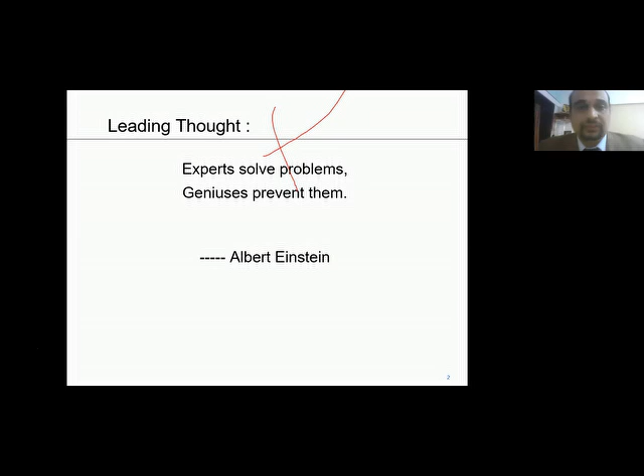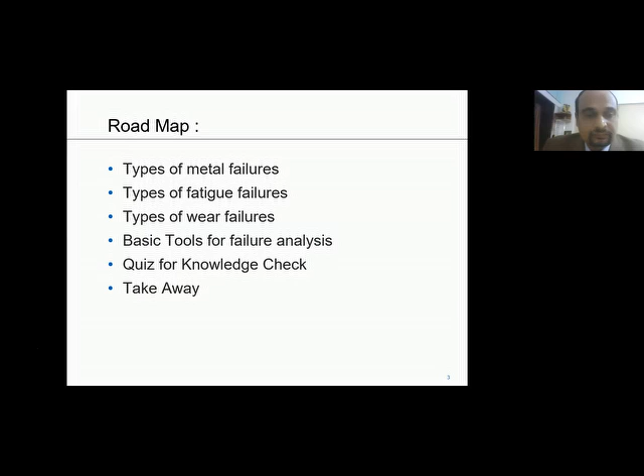Okay, so as you know there are two prominent failures, ductile and brittle. So what really is a ductile fracture?

Before I go into the details of individual failures, let me tell you honestly that Sandeep indicated I will be presenting some case studies. I am not going to present any case study from any industry per se. I maintain that confidentiality and IP related things. But I have taken the photographs from the common public domain that is available, so I have ensured that I'm not disclosing any details for any of the companies I have been through. I have made it informative, and the information is available in the public domain. So just a clarification on that.

But I do have a plan to have one more presentation done like this for an extended period that will deal upon the case studies, masking all the information so that we maintain the confidentiality. So that is in plan, I'll be coming up with that shortly. Okay.

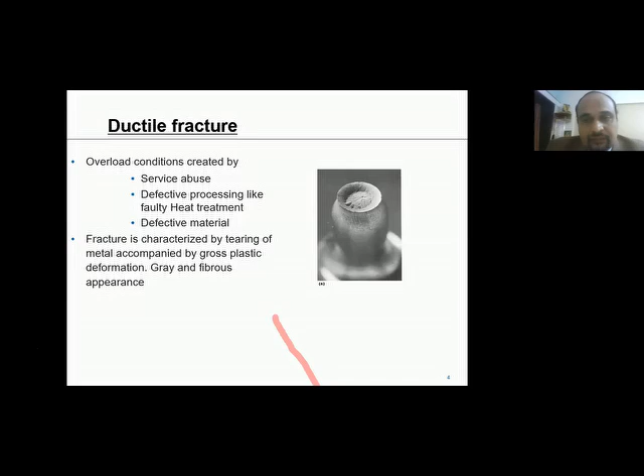Just a moment. So as you can see, the fracture is characterized by tearing of metal accompanied by gross plastic deformation. There is significant plastic deformation before the part fails. And a typical fracture appearance in ductile fracture is gray and fibrous.

So what could be the reasons for ductile failures? As some of them have been listed here, it's basically overload conditions created by service abuse, defective processing, say faulty heat treatment, or defective material. So these are typically the reasons why the material fails.

Mahesh, your screen has gone. Oh, is it okay now? No, not yet. I am also not seeing my camera, I cannot do anything. Just a moment.

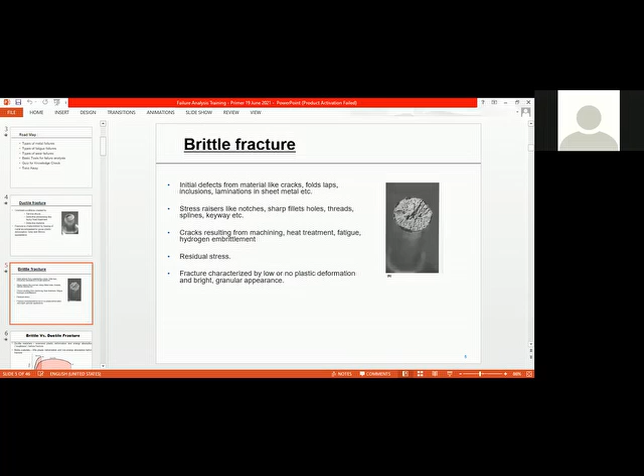Now try again. Yeah, it has started to come. I think some technical goof up happened. Okay, continue, we can now see it.

So this is how the brittle material will fail in a brittle manner. You can see the fracture shown here. It is characterized by low or no plastic deformation. There will be no indication before failure, and typically the appearance will be bright and granular. So looking at the fracture, you can differentiate whether it has gone in ductile mode or brittle mode.

So these are some quick checks that one can see on the part. What are the reasons? It can be initial defects like cracks, folds, laps, inclusions, laminations, or there can be stress raisers like notches, sharp fillets, threads, splines, keyways, cracks resulting from machining or heat treatment, fatigue, hydrogen embrittlement.

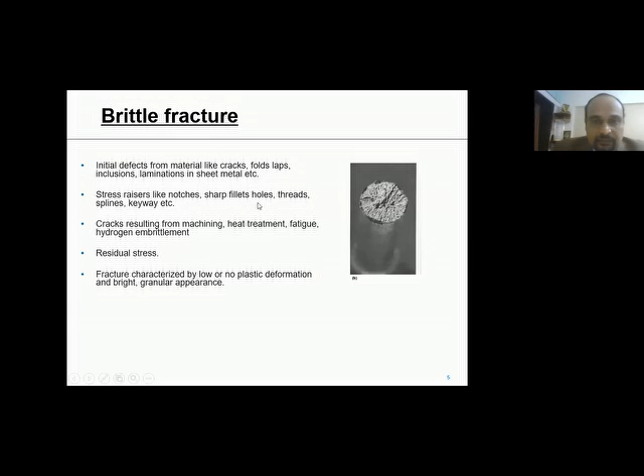That is also one very interesting thing happening in industry. Residual stresses, the prior residual stresses present in the material. So there can be n reasons. Some of them are documented here.

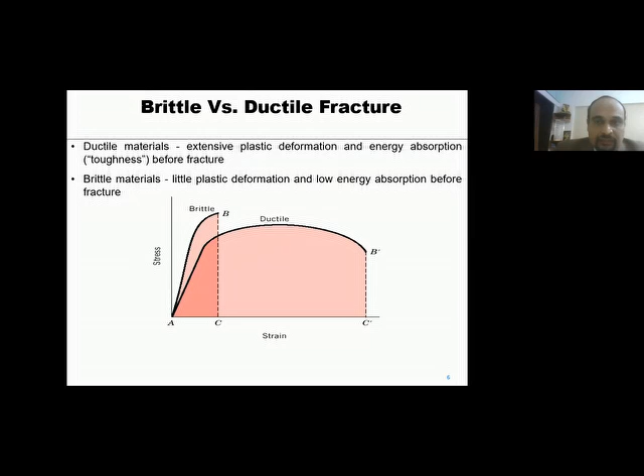So basically, this is very fundamental. Ductile materials have extensive plastic deformation prior to failure, so a lot of energy is absorbed, that is toughness before fracture. You can see this engineering stress-strain diagram shown for a ductile and brittle material. Whereas brittle material will fail without any indication, with very little or no plastic deformation, and the toughness will be very low.

Mahesh, could you be a little louder please? Very loud, your sound is very low. Okay, thank you. Is it okay now? Yes. Is this okay? Yes, okay.

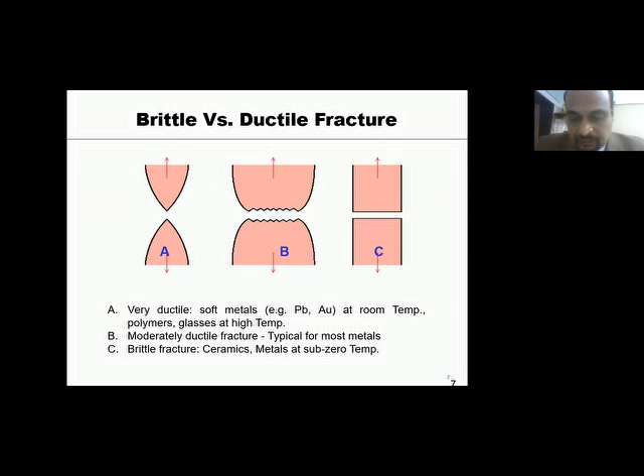The C category is for metals at sub-zero temperature or ceramics, because they are brittle in nature. So they will fail without any indication.

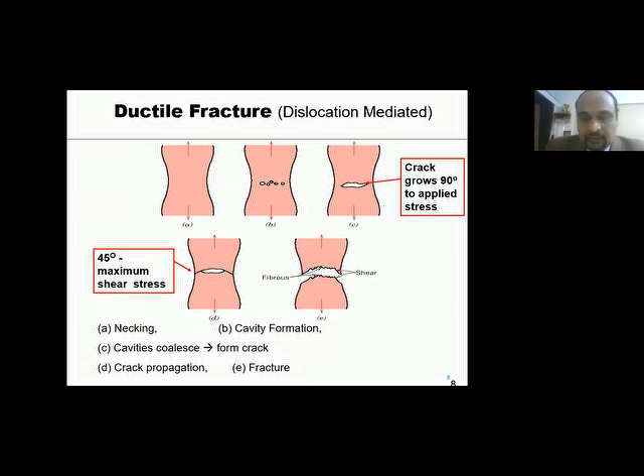So this is the cup and cone fracture shown in aluminum. Typically these are the two counterparts normally observed when you break it in tension. Scanning electron microscopy photographs are shown here just to indicate. It is typically dimpled ductile fracture, which is the term we use. These dimples are nothing but microcavities that actually initiate crack formation.

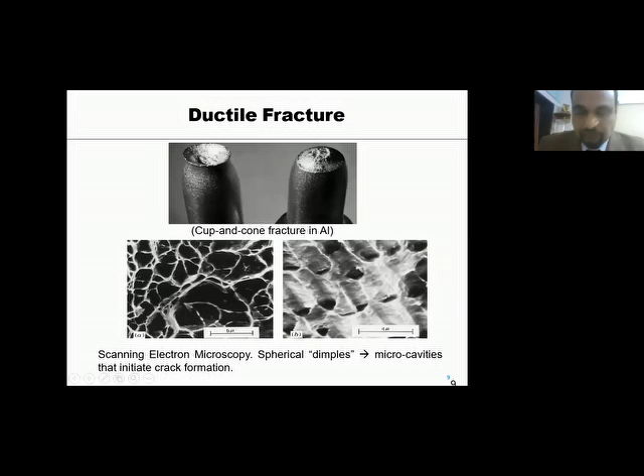So exactly opposite is brittle fracture. As I told, the crack propagation is very fast and it propagates perpendicular to the direction of applied stress. It is typically called a cleavage failure, where it is a breaking of atomic bonds along specific crystallographic planes. That is the metallurgical mechanism that happens in brittle failure, and there is no appreciable plastic deformation.

So you can see the fracture shown here, it's quite plain, quite planar. It's not like the ductile one, which has a shear fracture at about 45 degrees to the axis. So these are very, very quick points to judge whether the material has failed by ductile failure or brittle failure.

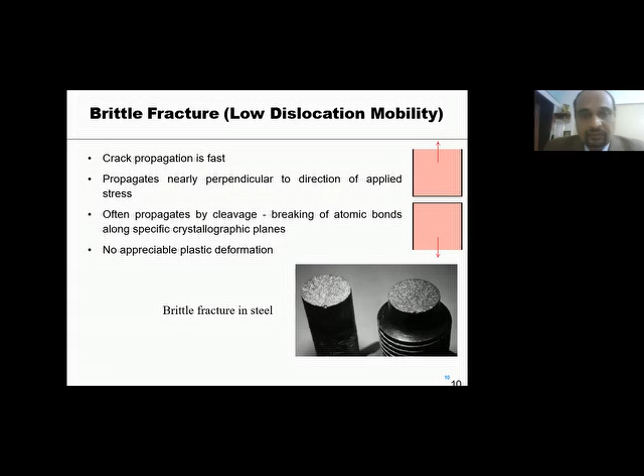In brittle failure, it can go in two manners. One is called transgranular, the other intergranular. Transgranular is the rupturing of grains, where the crack travels by rupturing the grains. Intergranular is where the crack follows the grain boundaries, which are normally weakened due to embrittlement or impurity. This typically happens in embrittlement failures.

You can see here the difference in the fracture as shown in scanning electron microscopy. Intergranular failure is typically called honeycomb, you can see the cellular structure. It's quite clear if the crack is following that path. Majority of brittle failures observed in industry are intergranular, because of embrittlement or some impurities onboard.

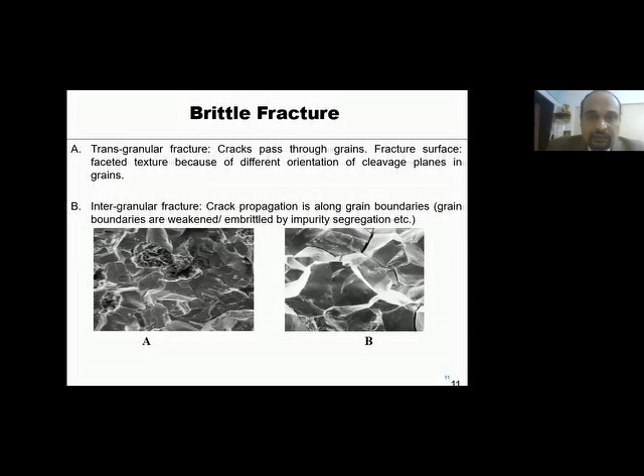Now coming to fatigue failure. Basically fatigue happens under fluctuating and cyclic stresses. The failure can actually occur at very low loads compared to static load. If you keep loading in static versus the part rotating, it can fail at a very low load than expected - that's called fatigue. In industry, 90% of all failures of metallic structures are fatigue failures, that is what the data says.

Mainly, the failures we observe in bridges and all industrial applications - aircraft, machine components, etc. - the reason is fatigue failure. The root cause could be various, but the reason is fatigue.

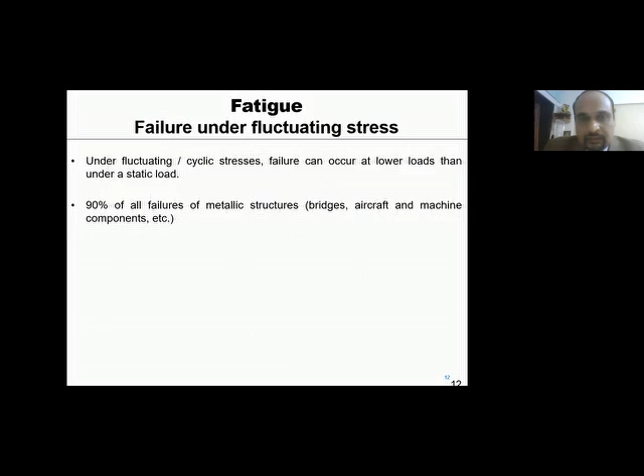So what is cyclic stress is what is important in fatigue. You can see on the screen some acronyms or symbols. What are the main terminologies used in fatigue? Nothing but mean stress, range of stress, stress amplitude, stress ratio.

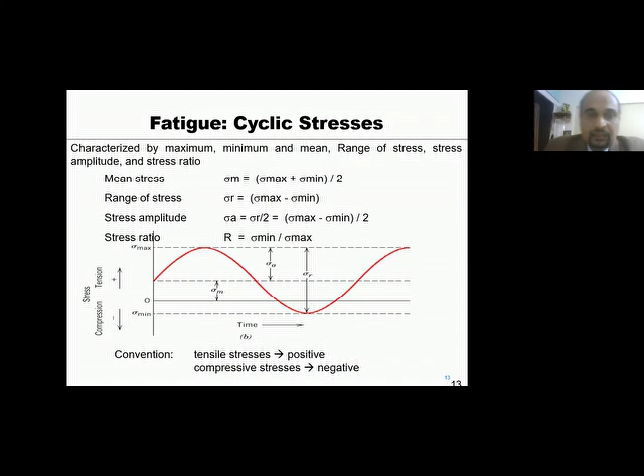You can see it's a sinusoidal wave. Tensile stresses are positive and compressive stresses are negative. So it's a sinusoidal wave, and several such waves form the alternating stresses to which a component is subjected. This is mainly used in fatigue life calculations, for determining the fatigue life of metal. These are the important terms in that.

How basically the fatigue life of a material is established or estimated - it is called a rotating bending fatigue test. As you can see here, there is a dog bone shaped sample made out of the part, and it is flexed by holding it as shown in the figure, and under bending load it is actually rotated. You can see the counter here, which counts the number of cycles the part goes through prior to failure or breakage. The aim is to break the sample and record how many cycles it has taken to break.

So what's the use of this? With this, at different loads, when we conduct this test, we get a stress versus number of cycles graph for the part. There are two categories: low cycle fatigue and high cycle fatigue. Typically, low cycle fatigue happens under very high loads - when you subject the component to very high load, it fails very early, in a low number of cycles. High cycle fatigue is where the loads are not that high, it's basically a low load failure, but the number of cycles is large. These are the common terminologies used in industry - low cycle fatigue or high cycle fatigue.

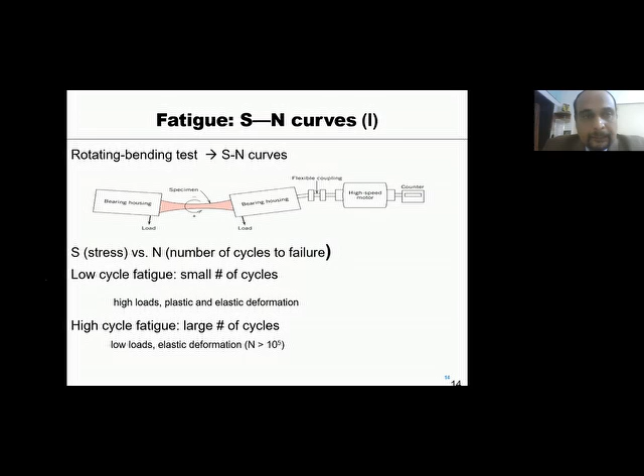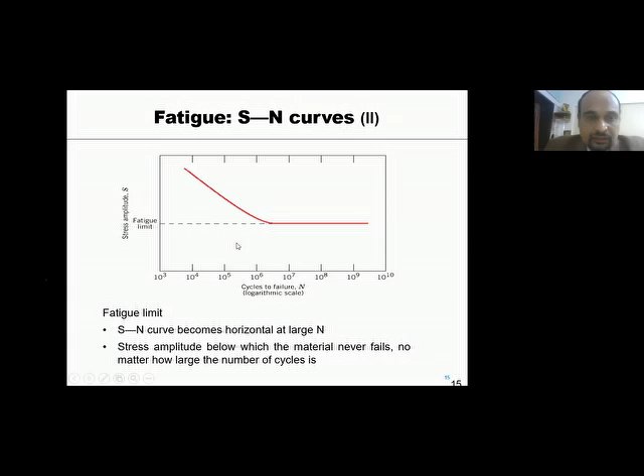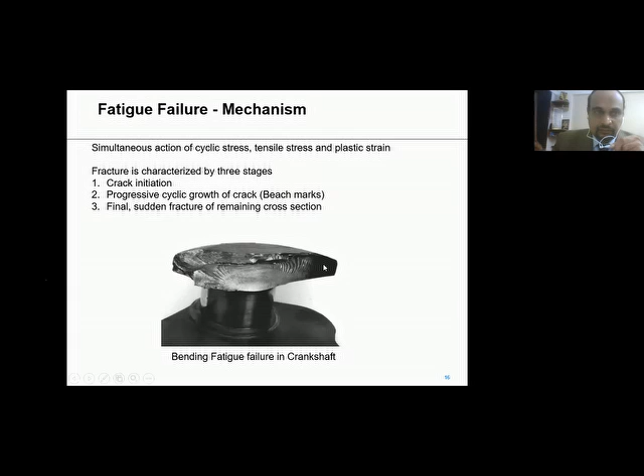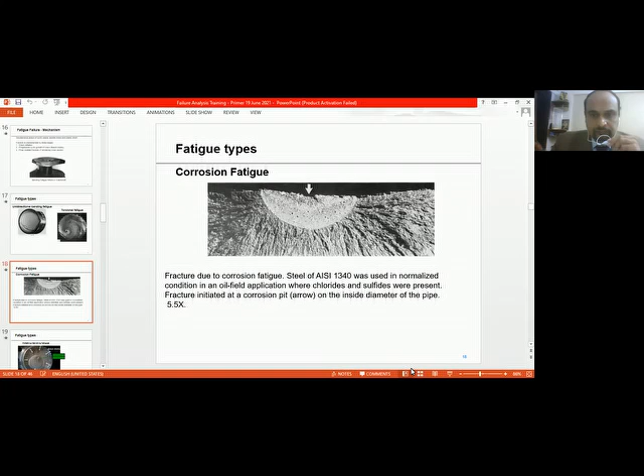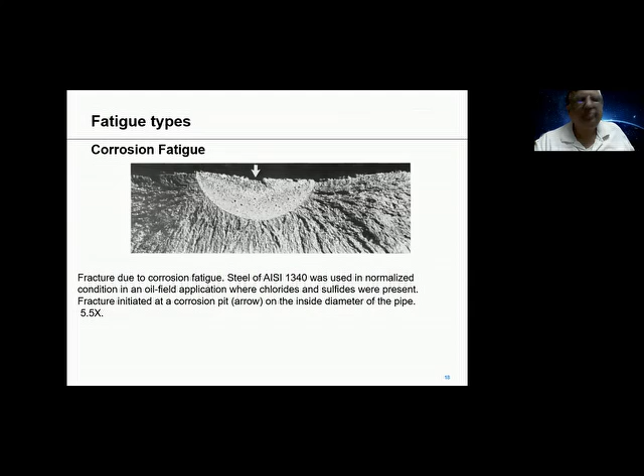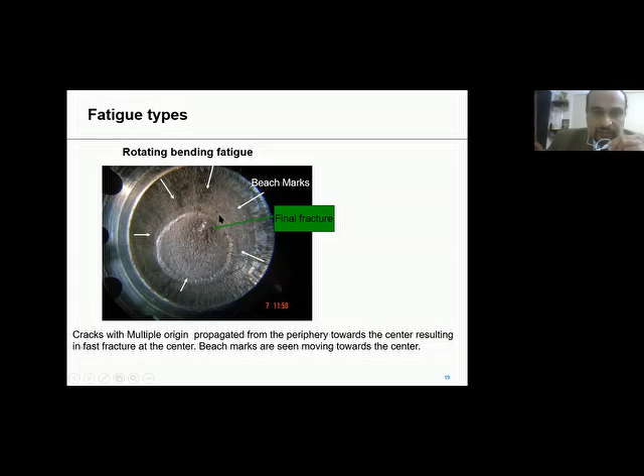So now this is what I was talking about, rotating bending fatigue. As you can see in this picture, the cracks start from multiple origins on the periphery and move inside, and you can see here the final fracture is very close to the center. So this is precisely the difference between torsional fatigue and RBF. And of course there is no twisting of lines, so that is an additional point. But if somebody sees it superficially, the fractures can get misled because of the similarity in appearances. So RBF is the fracture that starts from the periphery from multiple points, and the fracture travels inside towards the center, and the final fracture is close to the center.

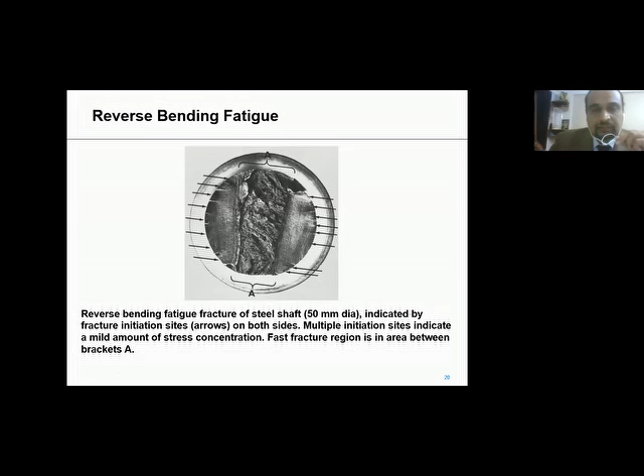So these are the very quick checks when we get to see fractures. At least, by looking at them—I'll talk about the tools later—but at least the naked eye examination and some low power examination gives us a very good idea as to what must be the fracture mode.

Now, this is another type that we observe in engine components: rolling contact fatigue. What is rolling contact fatigue? It happens in all components that are in touch, in contact with each other, and have a motion amongst them. So it can happen in gears, camshafts, and rolling element bearing rollers.

So, typically, what happens? Is that okay, doctor? Any problem, like inaudibility or anything? No, it is okay now. Please go ahead. Okay, yeah, thank you.

So the crack typically generates at subsurface level, and then it travels and connects to the surface, and the portion is plucked off. It is typically called spalling. We observe this in camshafts when they experience overspeeding in engine operation. This is also typically called butterfly wings. If you see an ASM book, it has been described as butterfly wings, as the pattern of the crack is like butterfly wings. So this is rolling contact fatigue that happens in contacting surfaces.

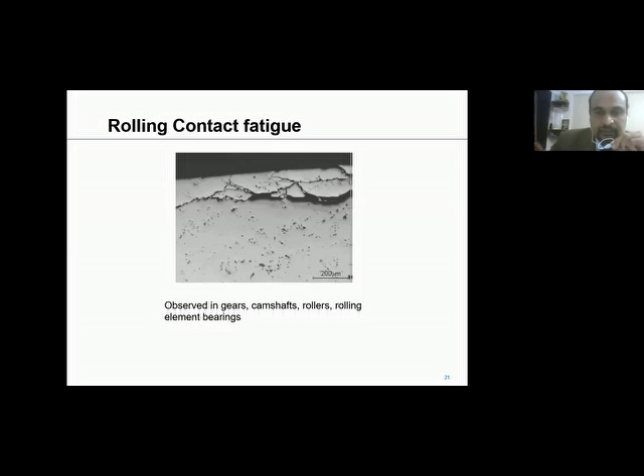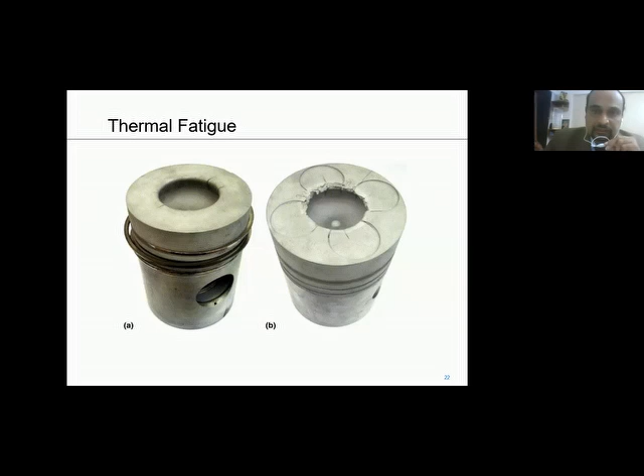So coming to the causes of fatigue failures. What could be the causes of fatigue failure? If you see the causes, they are interlinked. It is only the manner in which the part fails that determines the mode of failure. But for fatigue, there can be service overloads that can affect high cycle or low cycle fatigue - sorry, high stress, low cycle fatigue. Then there can be bad design where there are abrupt changes in adjoining sections of the part, so it's basically a design issue.

Or there can be inherent material defects like inclusions, cracks, porosity, shrinkage, manufacturing flaws like sharp radius, improper blending of radius, and residual stresses - tensile residual stresses that can happen in machining operations like grinding and polishing. Every machining operation will create some kind of residual stress which we need to mitigate.

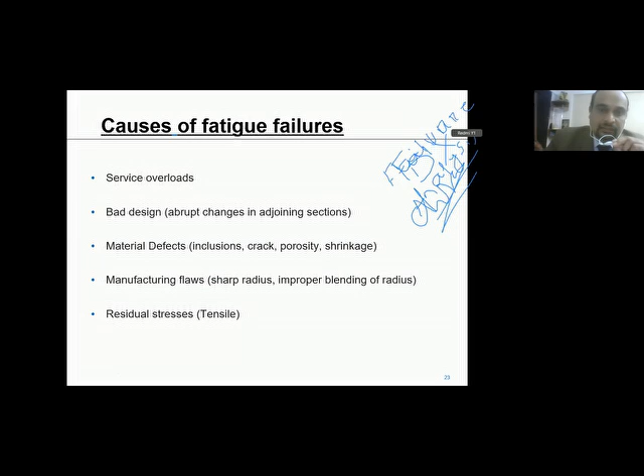These are the typical reasons, and I have talked largely in my presentation about surface fatigue, but there can also be subsurface fatigue generation. These are the causes that can generate subsurface fatigue: inclusions, cracks, porosity, or shrinkage - whatever inherent defect is in the material will start a subsurface fatigue initiation. I don't have the photograph right now with me, but I'll include that. Typically, by the location of fatigue initiation - whether it starts from the surface or subsurface - you can proceed with your analysis, because that will change the direction of analysis.

Now coming to wear failures. Wear and friction go hand in hand. Whenever there are surfaces in contact, there will be friction, and if they are under load and in motion, wear will definitely result. That's why wear is defined as progressive loss of material from a surface as a result of relative motion at the surface. Wear is usually a gradual process, and there are no accurate means to quantify it. Friction and wear are influential on each other, so it's really a complex relationship, and there are many factors that need to be studied to arrive at a proper root cause.

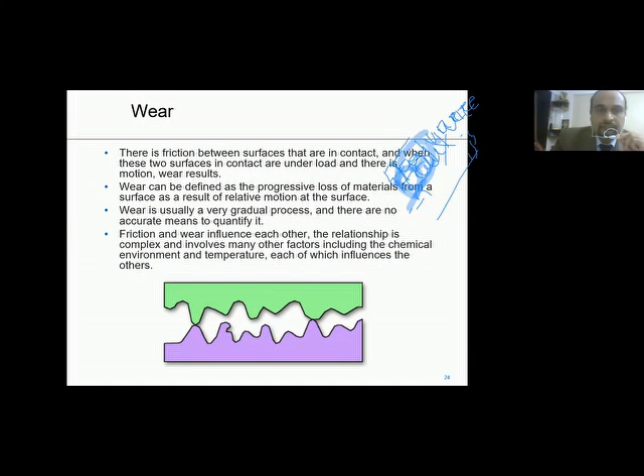Screen is not changing. I'm just trying.

So why do we focus on wear in industry? Because wear is undesirable - there can be increased clearances between moving components, loss of precision, and because of that there will be increased vibration and loading. It leads to significant maintenance and replacement cost in many applications, and the efficiency of the equipment is also reduced. That's why wear is undesirable.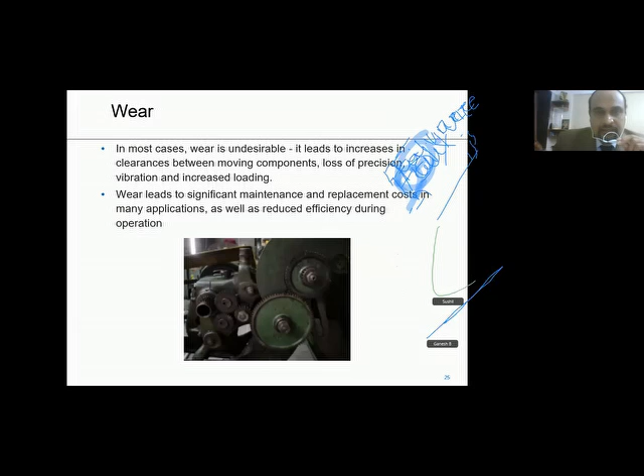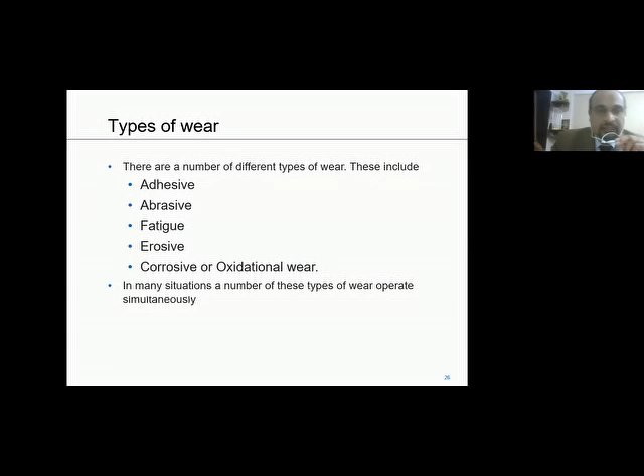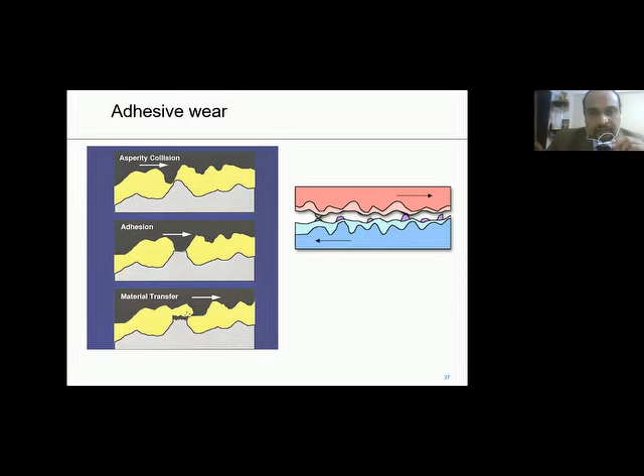So here the adhesive wear mechanism is shown. Whenever two contacting surfaces are sliding against each other under load, there will be asperities, which are high points in the contacting materials. These high points will collide with each other while moving against each other under load. This collision results in adhesion of the high points, and material gets chipped off or plucked from one material to the other, depending on which hardness is more. This material gets firmly glued to the harder material. This is called adhesion or adhesive wear.

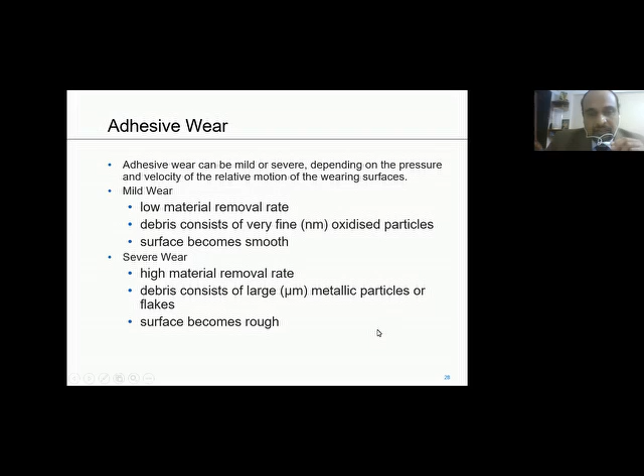It can be mild or severe depending on the pressure and velocity. These are two very important parameters in friction: pressure and velocity, called the PV factor. Depending on that, the adhesive wear can be mild or severe. Mild wear has a low material removal rate, and the debris consists of very fine oxidized particles, and the surface looks smooth. But severe wear has a high material removal rate, and debris consists of large metallic particles or flakes, and the surface becomes very rough.

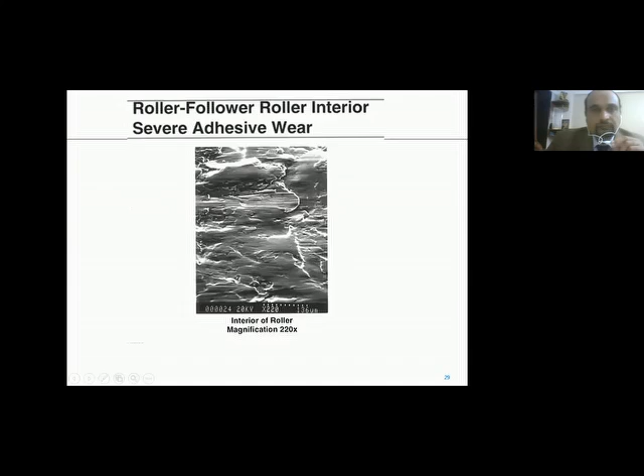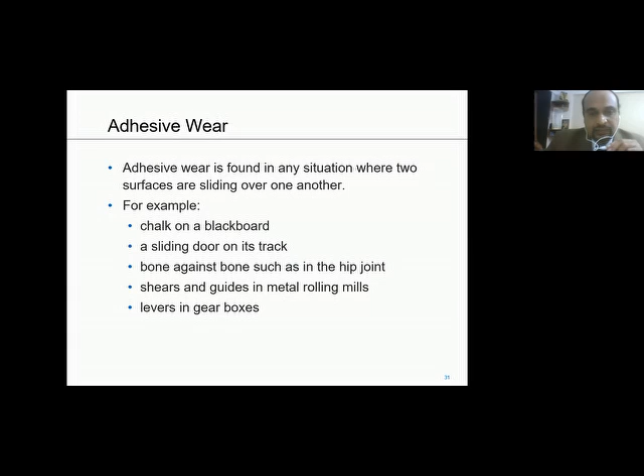So what are typically the cases where you can find adhesive wear? As I told you, two surfaces need to slide against each other under pressure and under load. Examples are chalk on a blackboard - this is a very common example that we see - a sliding door on its track, our body where bone rubs against bone such as the hip joint, shears and guides in metal rolling mills, and levers in gearboxes. So wherever there are sliding surfaces, adhesion can happen.

Adhesive wear can happen. Now coming to the second type of wear, which is called abrasive wear. Abrasive wear happens mainly because of dirt particles that get contaminated into the contacting surfaces. Basically, the way to reduce abrasive wear is to increase the hardness and decrease the roughness of the material, and also flush out all the contamination - dust, dirt, and abrasive particles - from the system. Otherwise, abrasive wear will happen.

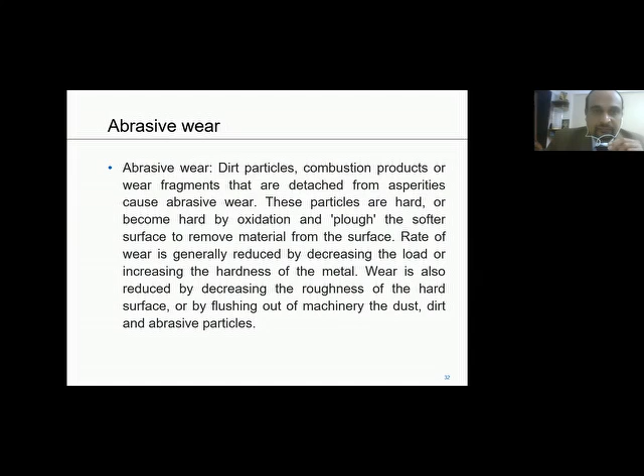Basically, abrasive wear is because of a particle that gouges or impacts a surface. It can be two body or three body. What is two body? A digger blade that hits gravel embedded in the earth - in earth moving equipment, if the blade is digging the earth, it can hit gravel embedded in the earth and abrasion can happen. Circular saw, when it cuts, there can be abrasion, or any cutting or polishing tools - when they are cutting, abrasion can happen.

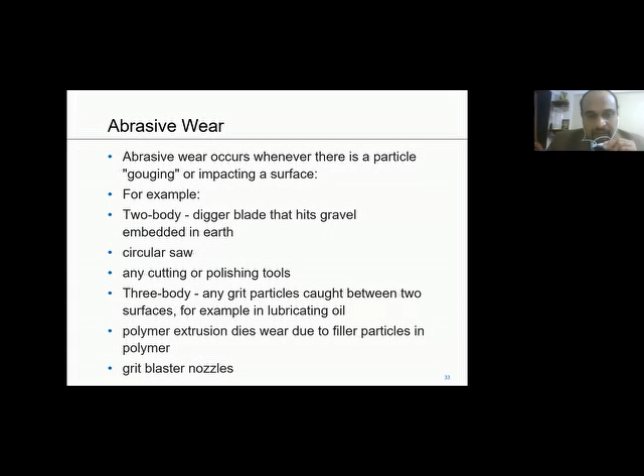Three body means any grit particles that could get caught between two surfaces. For example, lube oil - if lube oil has contamination, it will wear out the contacting surfaces. You can see polymer extrusion dies wear due to filler particles in the polymer itself - they come out and form a third body that wears, grit blast and all that. So basically it's either a two body or three body wear. Here it is shown schematically.

So this is typically how abrasive wear will look like. You can see that pure abrasive wear has no tearing of surface, as you can see in adhesive wear. Abrasive wear will have scoring marks like this, as shown in the picture.

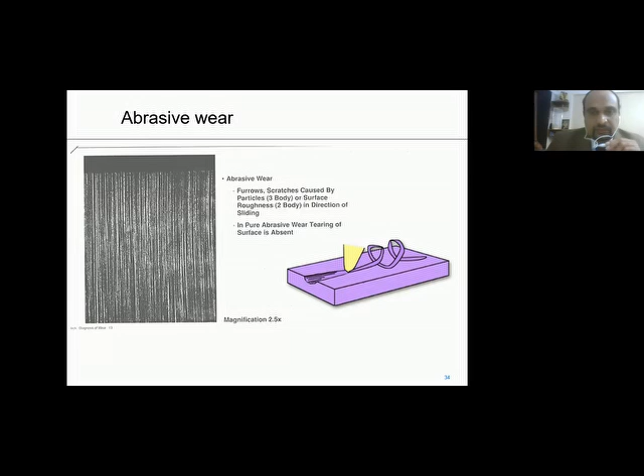Now, this is another interesting wear type, called erosive wear. What exactly happens? A classic example is in the cylinder liners in a diesel engine, where the water cooling used for the liner has aeration happening around in the water cooling jacket, and the water forms very tiny bubbles. These water bubbles implode on the liner's outside diameter and pluck out the material. This is typically called cavitation erosion.

In the case I mentioned it was water bubbles, but there can also be external impact on the surface by a particle, which chips out the material. This is typically called erosion - it erodes out the material. So the typical case I described is cavitation erosion that we see in cylinder liners.

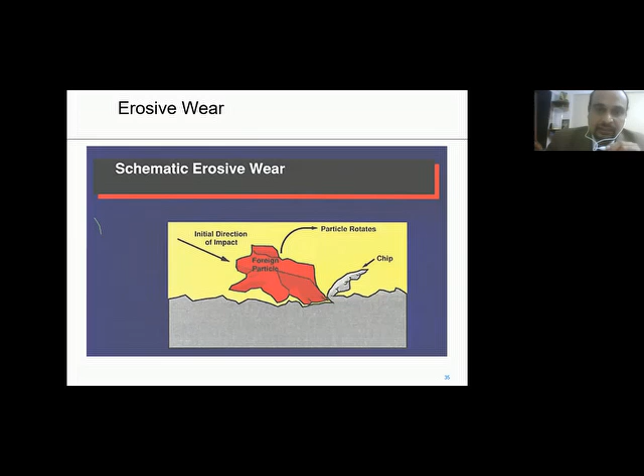This is how, even when we do sandblasting for the removal of dirt and stuck parts from steel, it is the same mechanism that we employ. It is a sand particle - we blast it with sand particles, and it removes that stuck debris or contamination.

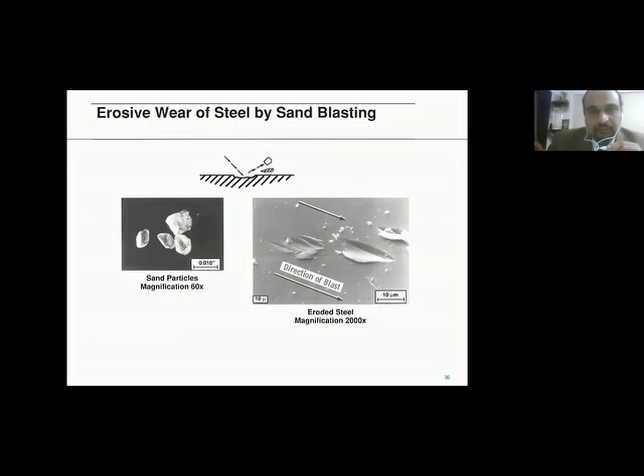Now, what is contact fatigue? I described rolling contact fatigue. Here again the same schematic is shown for the contacting or rolling, versus static contact. In the rolling contact, you saw the subsurface generation of crack, which then extends, and this entire piece is removed finally. This happens under stress. These cracks start generating at subsurface level, propagate, and extend up to the surface, and the whole thing is chipped off, which is normally called pitting.

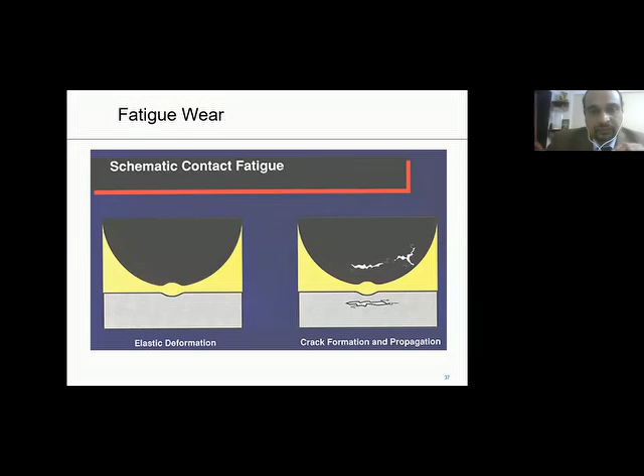A very prominent failure of this sort is observed in camshafts, where under high speed or overspeeding, they chip off, or have the pitting defect when they experience overspeeding. They fail by pitting, which is nothing but rolling contact pitting.

The same thing is depicted here, called fatigue wear. This is an engine lifter, which is nothing but what I was talking about, a cam follower roller or cam follower element. This is how cracks will generate at the subsurface level, connect to the surface, and remove the whole chunk over extended operation.

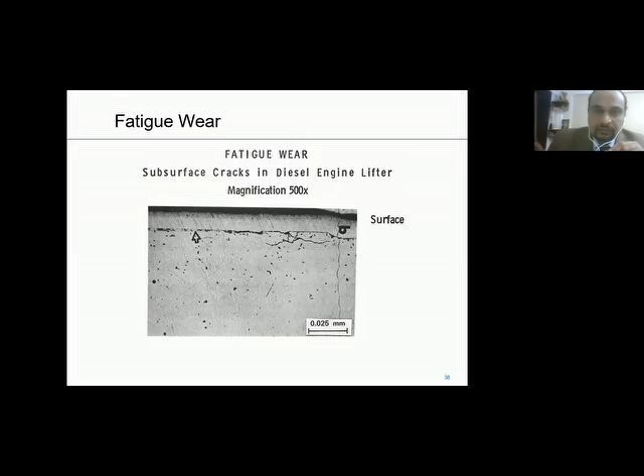Now there is another variety called corrosive wear. We saw erosive wear; there is also corrosive wear. If the part is in contact with an acidic environment, like sulfuric acid or a very highly corrosive environment, a corrosion film will form on the part, on the substrate. This corrosion film will grow and remove material from there. This is called corrosive wear.

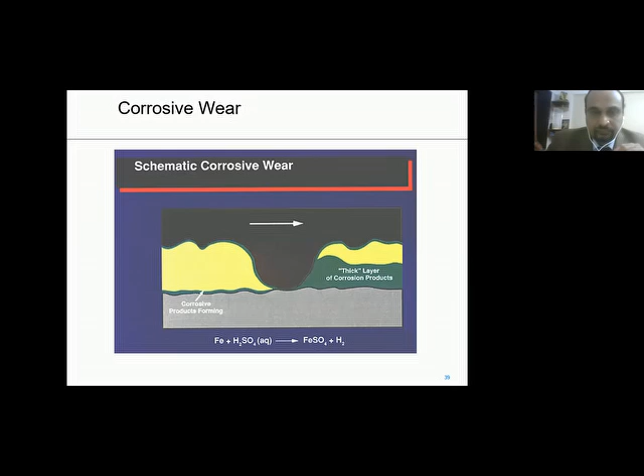Now, fretting wear - what is fretting wear? The parts are in contact, in motion, with relative motion between them, so they continuously hit against each other. If you see the surface, you can see micro welding, which is very tiny. The high spots in both materials will glue together, forming a sticky substance on the surface, called micro welding of asperities. So you will see a very damaged or indented surface when you observe fretting.

That is a sign that there was relative motion on the part. It can happen in static contact also, because if there is a slight relative motion in static contact, fretting wear can be seen.

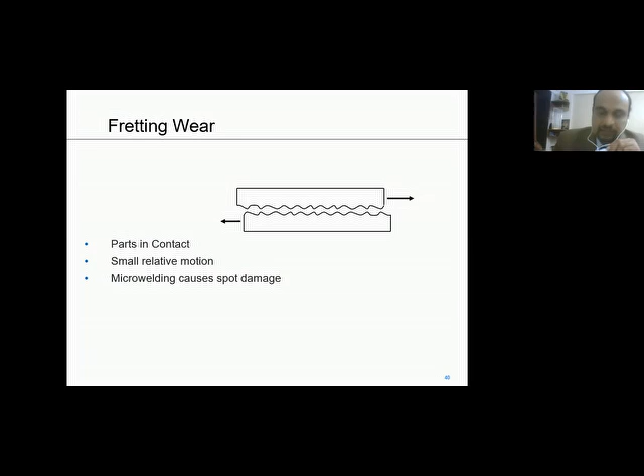Now, what are the temperature-induced failures? Low temperature failure, high temperature failure, and thermal cracks, which I already discussed. Low temperature failure is nothing but sub-zero temperature failure. A typical case we can date back to is the Titanic ship, which was hit by an iceberg. Since the temperatures were freezing, the metal lost its toughness.

The iceberg hit it, and there was crack generation, and the whole ship sank. What really happens is the material loses its ductility at very low temperature, like sub-zero, and even ductile material behaves in a brittle manner. This can cause catastrophic failure when subjected to sub-zero temperature. High temperature failure also can happen, because if subjected to high temperature and constant load, they undergo a mode of failure called creep, which is irreversible deformation. There will be permanent deformation, and the material will lose its intended ability or use. Thermal cracks, already discussed, are due to cyclic heating and cooling, which form micro cracks that lead to failure.

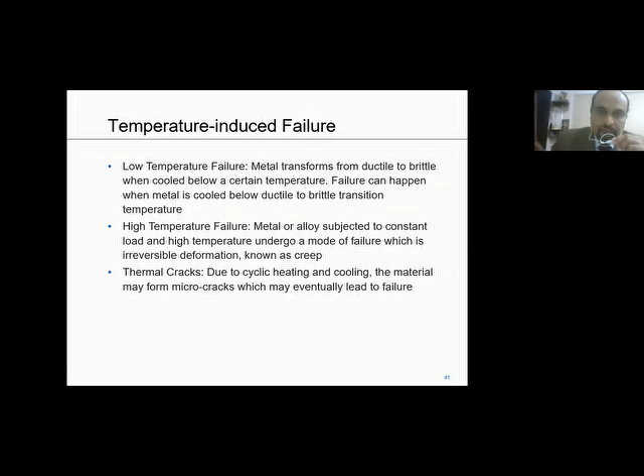Okay, so coming now to the tools that we can use for failure analysis. I will also touch upon the SOP for failure analysis once I discuss these tools. So what needs to be done for proper failure analysis?

Then, if needed - and it is always required - you take it to a low power lens or stereoscope, where you can have further observations on the part, like how it has failed. I have described a few failed samples in my presentation, showing what kind of characteristics we see on the failure or fracture.

So those can be ascertained by low power lens observation or stereoscope observation. Then you can go with NDT, non-destructive testing, which is basically MPI crack testing - whether the crack part has additional cracks, or can you see some additional cracks besides the failed part. Are there any indications that it has been subjected to overstress or anything you can ascertain, which is called magnetic particle inspection.

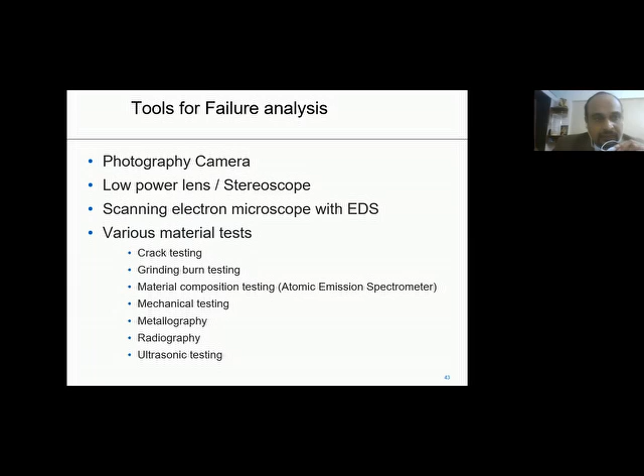So right, are you ready? Is everybody ready for the quiz? I'll open it now. What we can do is people can read and respond in the chat, and then we'll solve it once everybody is done. Take a couple of minutes, and in the chat box indicate true or false for questions one, two, three, and also indicate A, B, C, D for the second part. Let's see what people can do. We'll spend a couple of minutes and then solve this.

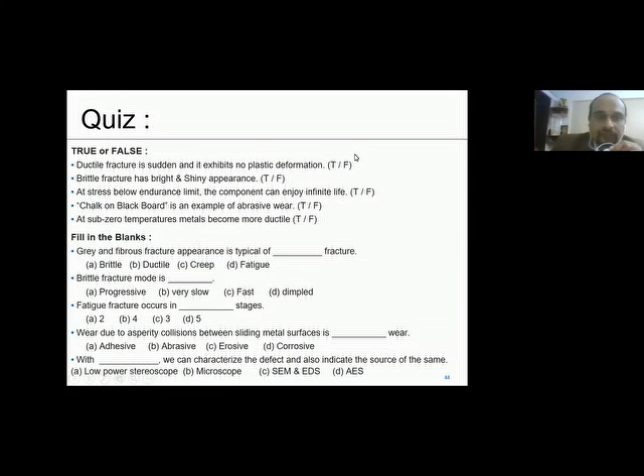Is that okay, Dr. Singh? Hello? Yeah, it's okay. So people will dwell on it for a minute and then we will solve it. Yeah, correct.

Is everybody done with their choices, or at least tried the first 10 questions? They are on true and false for the fifth one. We'll wait a minute more for them filling in the blanks. Okay, grey and fibrous structure.

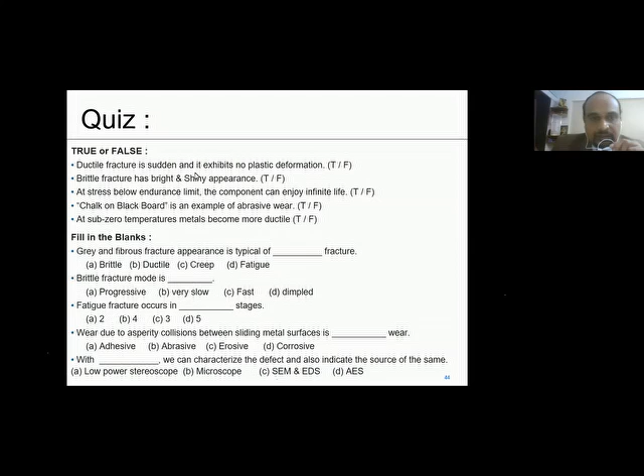So that's why any expert or genius is called a successful person. How to become successful is nothing but gaining expertise in the domain - that's depth of experience. So in the domain of failure analysis, how deep one can go, as I described in the SOP.

Is there anything? Continue, sir. Can I continue? Yeah, please. Screen is not visible. No, screen is perfectly visible. I think maybe your internet is playing up. Shall I share it again? Yeah, you may, but it's already there on the screen. Not visible actually. Hello.

Sir, can I have some addition, or would I like to add up my thoughts? Just a moment, actually. Let me just finish this. Let him complete first. Sure, sir. Let me just finish this portion, which I thought is very important.

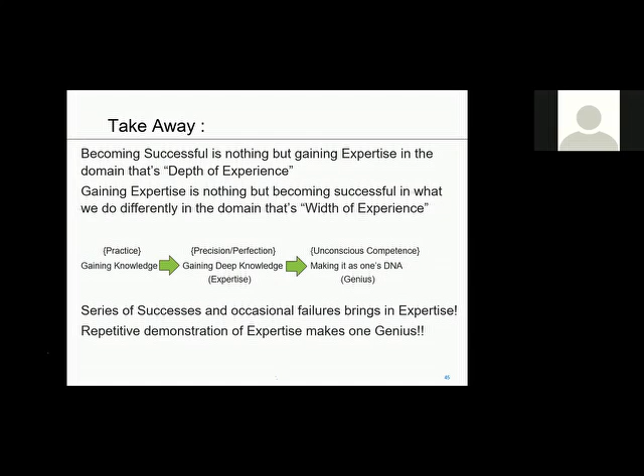So I was talking about how to gain that expertise and go to that genius level. We need to have a depth of experience, which is technical depth. How deep we can go in the domain will determine whether we gain that expertise or not. Having that expertise is nothing but becoming successful in what we do differently in the domain. So when we say failure analysis, how many different cases one handles is the width of experience. So to become expert and in the journey of becoming genius, these two are very important: developing technical depth and also the width of experience.

So for that, we need to be continuously practicing the tools that we know in failure analysis. That will keep on sharpening the edge and gaining knowledge. So that practice will make us precise, make us perfect every time we do it. So that is the journey to gain deep knowledge, which is expertise.

And then it should so happen that it becomes our unconscious competence, so that becomes our DNA. When it becomes our DNA, then that journey towards genius is accomplished. Again, this cycle repeats because we have to stay at that level, so this cycle will never end. We have to continuously work through this cycle to remain competent in the field. So that is how it is summarized here: series of successes and occasional failures brings in expertise, and repetitive demonstration of expertise makes one genius.

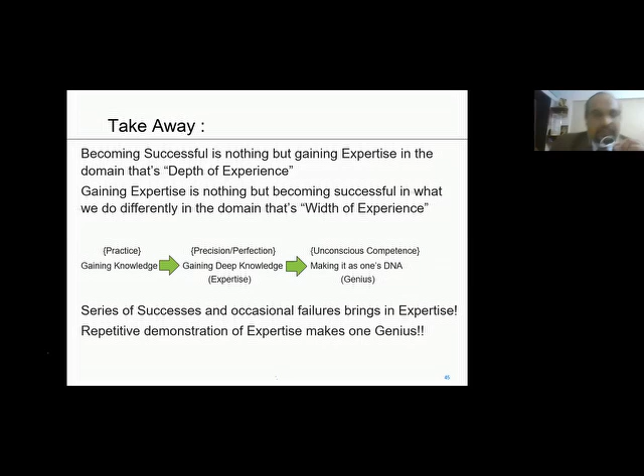I think with that, I end my today's presentation. Thank you all for your patient and attentive listening. I really appreciate you for your active participation in this. Now I'll open it for Q&A.